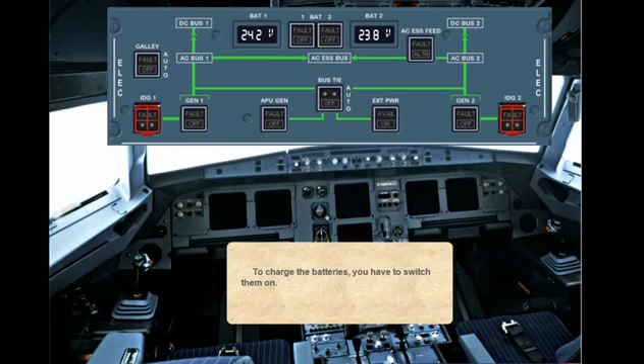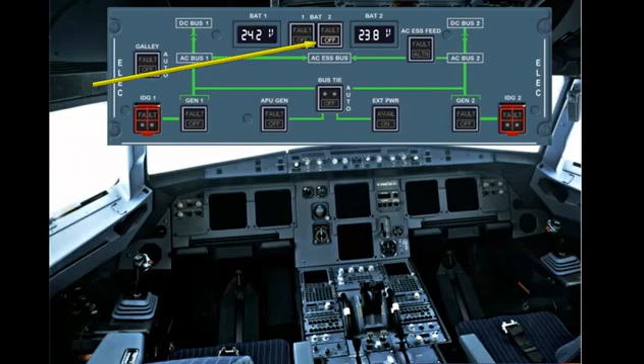To charge the batteries, you have to switch them on. Switch BAT1 on. Notice the off light has illuminated on the BAT2 push-button switch, because now the aircraft has electrical power to provide that indication.

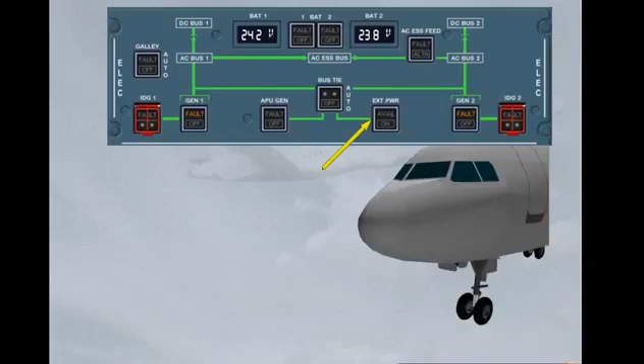Switch BAT2 on. Because the green avail light is not lighted, meaning that you have no ground power, you have to ask the ground personnel to connect a ground cart. Click on the mechanic.

The ground cart is now connected. The green avail light has appeared, which means external power is plugged in, its voltage and frequency are normal, it is ready for use.

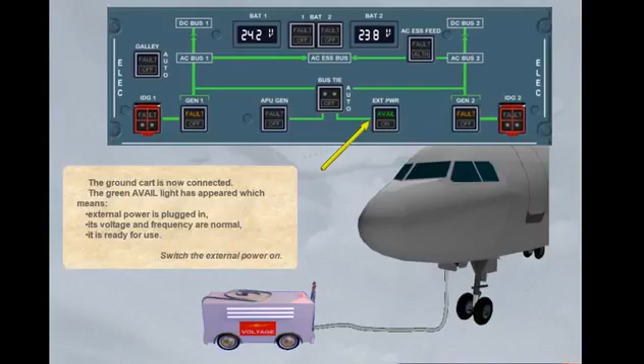Switch the external power on. When the blue on light is illuminated, the ground cart is supplying the aircraft.

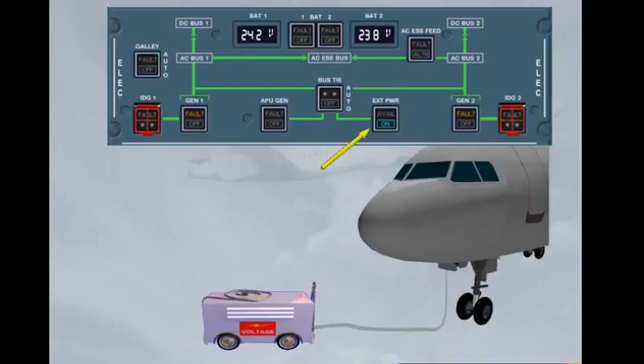The ECAM electrical page has been called for you. We can confirm that the external power is supplying normal voltage and frequency because the parameters shown on ECAM are green.

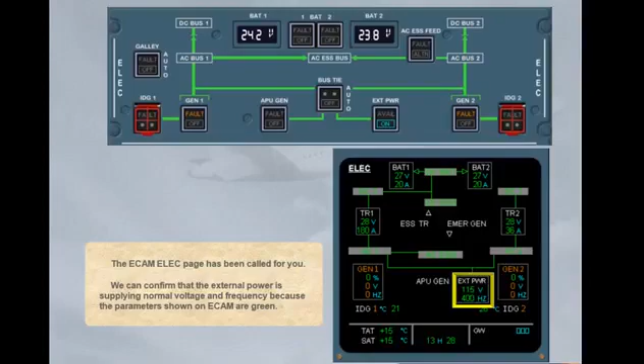By following the green lines on the ECAM page, you can see that the external power is supplying all the electrical system.

Notice that because the engines are not running, the indications of the associated generators are in amber, and fault is illuminated in amber on the generator push-button switch.

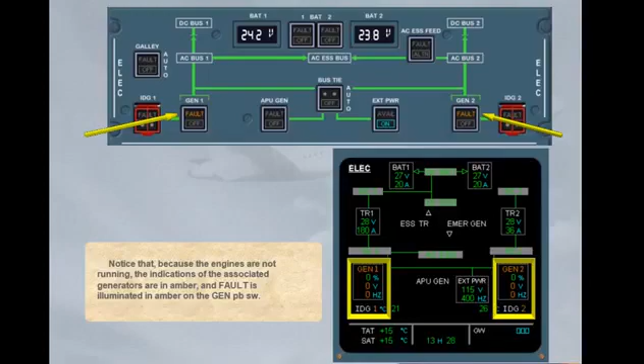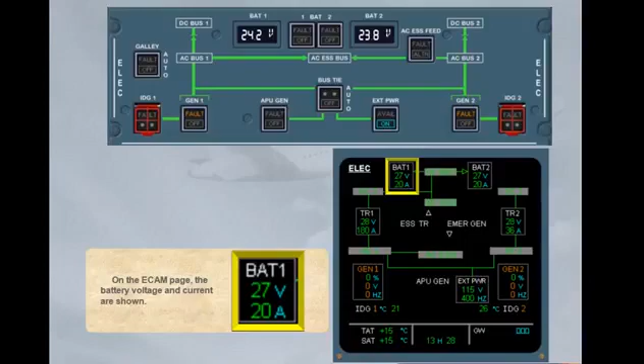On the ECAM page, the battery voltage and current are shown. You can also see the green arrow, which indicates that the DC BAT bus is charging battery 1.

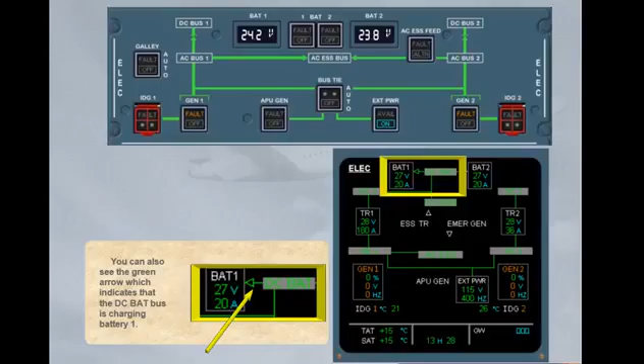Both batteries are now charging from the DC BAT bus. During this time, you can continue with your cockpit preparation. The average charging cycle is approximately 20 minutes.

As you can see, both batteries have now disconnected from the DC BAT bus. There are no green lines connecting the batteries to the DC BAT bus.

In order to check the battery's voltage, you normally have to switch them off. Switch BAT1 off.

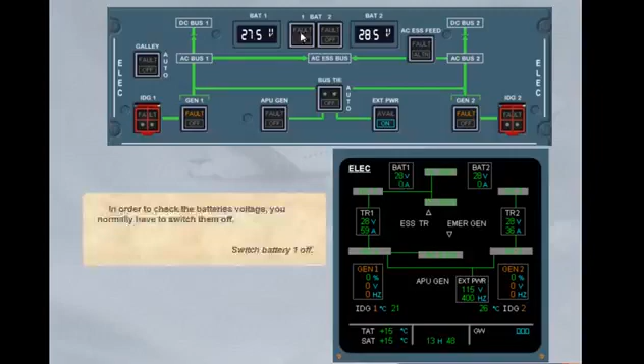You can check on the panel that the voltage of battery 1 is normal. Notice the white off indication on the ECAM page and the off light illuminated in BAT1 push-button switch.

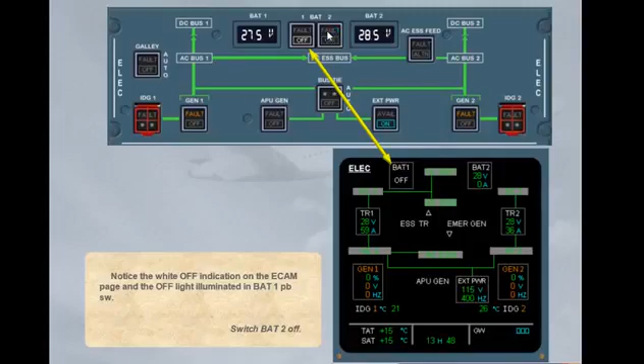Switch BAT2 off. As you can see, both batteries now have voltages above 25.5 volts. The battery charging cycle is complete.

We need to switch the batteries back on. We will do this for you. Both batteries are now available. Voltage indications are now displayed green.

It is time to start the APU and disconnect external power. We will start the APU for you. You can see on the ECAM page that the APU generator parameters are now displayed.

Notice that the APU generator has not automatically taken over supplying the electrical system from the external power. This is because external power has priority over the APU unless external power is deselected.

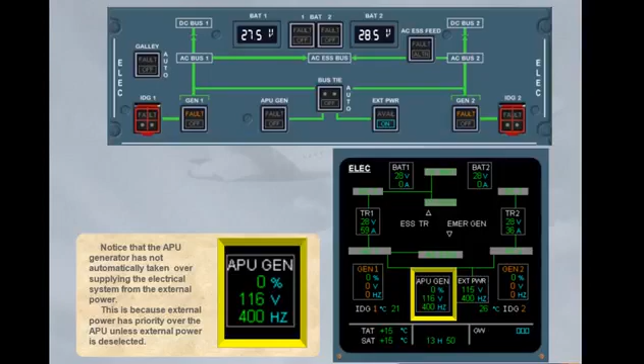To select the APU generator, deselect external power. Switch the external power off.

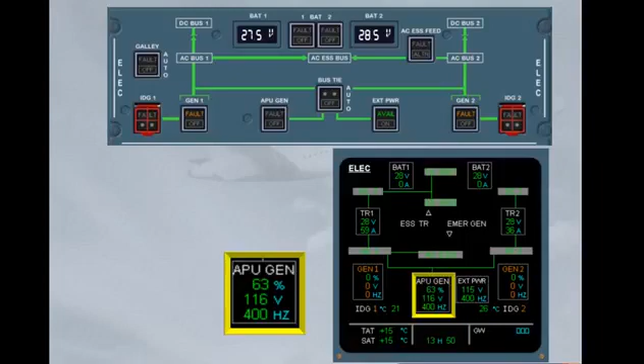A green line has appeared connecting the APU box to the system. This means that the APU generator is now supplying the aircraft. You can see that the load is 63%.

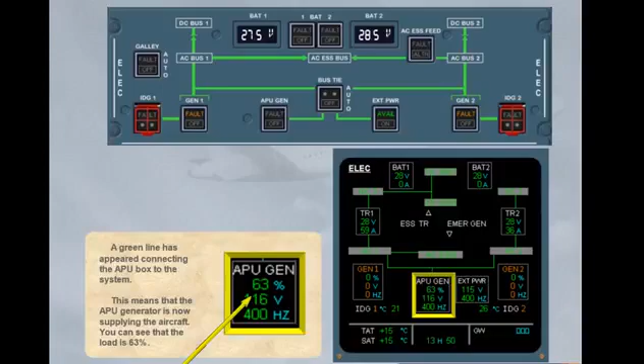We can see that the external power is still available. However, we no longer need it, so it can be unplugged by the ground personnel. Click on the mechanic.

The avail light is extinguished, and the external power indications on the ECAM have disappeared. The external power source is disconnected.

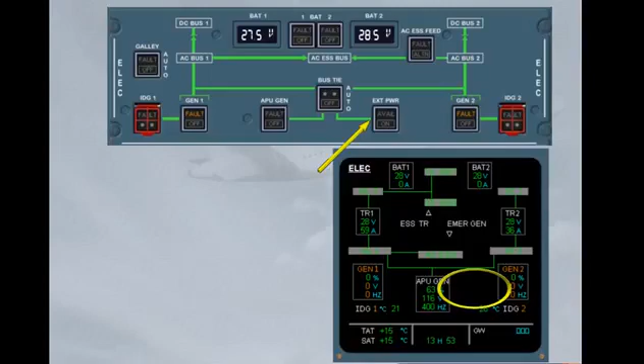You have finished the normal operation A. We will continue with normal operation B.